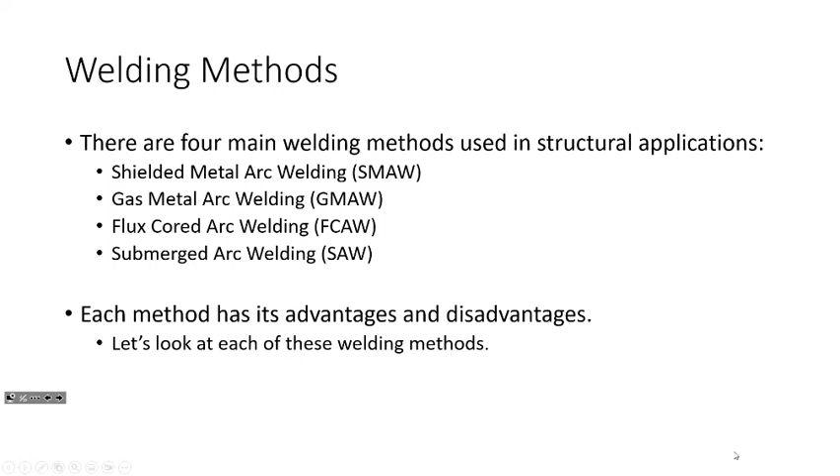But don't worry, I've got a slide for each of these. So the first one I want to talk about is shielded metal arc welding. You probably know that as stick welding, and I'd say that stick welding is probably the most common type of welding used in everyday structural applications.

First off, if you've never welded before, the first thing I want to make crystal clear is that we are not gluing piece of steel A to piece of steel B. That's not what's happening. In weld land, what we're doing is completing a circuit between our weld machine, our workpiece, and the weld electrode, which is essentially a consumable. Once that circuit is complete, electricity flows, and we are creating a molten pool of essentially three metals: the workpiece, the element I'm welding to the workpiece, and the weld metal itself. Once that metal cools, we now have a welded joint.

So welding requires a lot of energy input in order to make that happen. There is a whole field of science on the metallurgy and chemistry required to properly deposit welds and to make this happen.

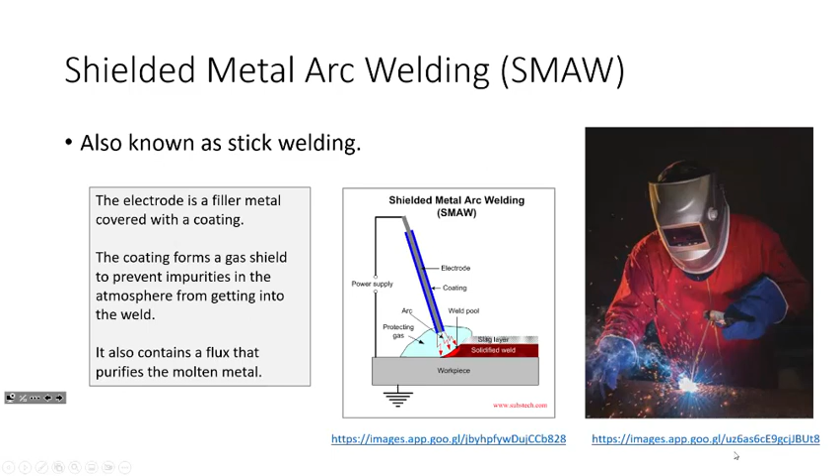Whereas in MIG welding, we do that a little differently. Instead of a flux that coats the electrode, in most MIG welding applications, not only do you have the weld on a continuous feed, but you usually have a gas shield tank connected to that. Once you hit the trigger, not only are you depositing the weld electrode, but you're also depositing that gas as well.

How many of you have ever done MIG welding before? What do you think is easier, stick or MIG? I'm just curious. I like MIG because that's what I have, and you can actually weld more continuously — than stick, it's faster. You have a continuous feed of electrode in the machine. It comes on a drum, about that big around, and it's continuously fed. The electrode to me kind of looks like copper wire — it's a little different than that, but it's kind of like copper wire.

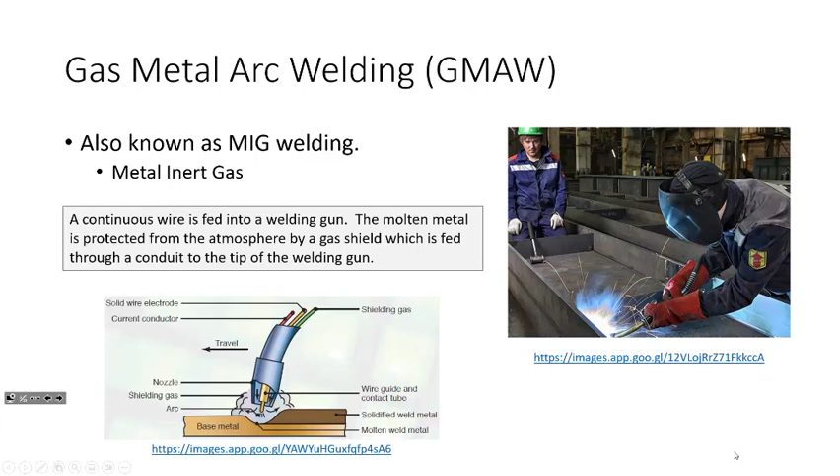It's funny, I've asked a lot of professional welders this question, and a lot of times they think stick welding is easier. To me, I never really got that, because if you're MIG welding, you just have to do this, but if you're doing stick welding, you have to maintain your horizontal movement and your depth as well. I always thought MIG welding was easier, but that's just me. These are the two predominant means of welding used in most structural applications.

There are some slight variations to that. One of them is called flux cored arc welding. Basically, flux cored arc welding is a lot like MIG welding, but instead of using a gaseous shield to protect the weld from impurities in the atmosphere, the electrode itself has a flux core that protects it as well. You can usually tell flux cored welding when you deposit it because it has this sort of white, sooty deposit after the weld. Flux cored arc welding is a lot like MIG welding, but you don't need the tank of shield gas.

Flux cored has a really cool application if you're ever welding in the field. If you're welding in the shop and using a standard MIG welder, you're not really worried about wind blowing the gas shield away, but you are if you're in the middle of a field. So if you're welding in the field, you probably want to go with a flux cored process because you don't have to worry about the wind blowing away your gas shield. That's a good benefit of it.

Yes, sir? I use the flux cored just because it's cheaper, but there's a lot of guys online that will use the flux cored with the gas on top of it. Well, they must be really worried about a hydrogen environment. I guess it works out to make a really nice weld. Now I don't know about the structural stuff, if it's really that necessary, but it's just, I guess, a preference.

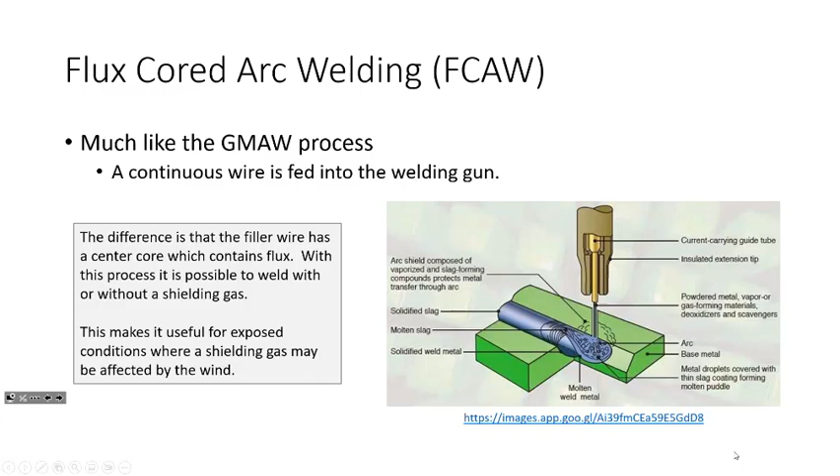Submerged arc welding is really, really good if you have a long, continuous weld that you're wanting to deposit. Stick welding, MIG welding, flux cored arc welding, etc. - those are really good to be done by human beings, and you can do those for really long welds or really short ones. But submerged arc welding is really only good for long welds.

A good example would be if you are fabricating a plate girder, and you have a flange on top of a web, and you want to weld those together. That is a single weld going along the entire length of the girder - that's a long weld. So for the purposes of ensuring proper quality assurance and quality control, it's a good idea to let a robot do that type of weld, and instead let human beings handle the more intricate, complicated welds that require that degree of control.

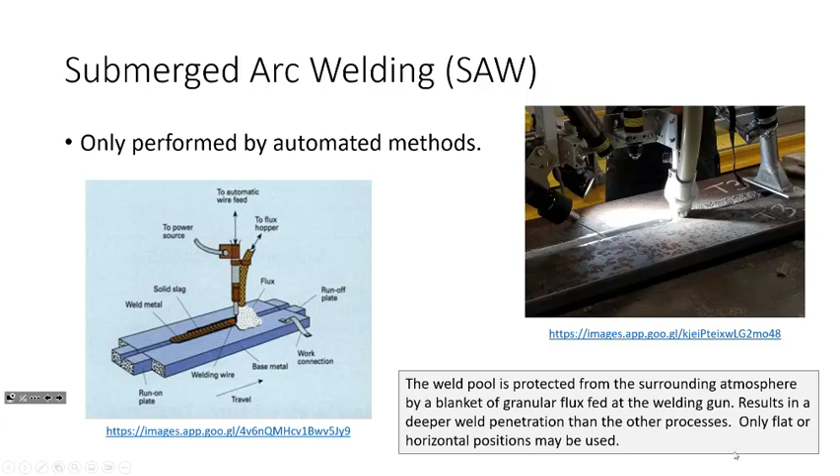The way the process works is that in order to protect the weld from impurities in the atmosphere, the weld is actually performed submerged. The first thing you will see is this deposit of granular material, and then the weld is done underneath that, and then the robot scoops that weld material up and keeps going. So the weld is actually performed underneath this granulated flux, hence why it's called a submerged process. It does allow for deeper weld penetration, but you really can only use that in flat or horizontal weld positions. We're going to talk about weld positions here in a second.

Before we get into weld positions, I want to talk about the types of welds that we deposit. And don't worry, I've got some pictures of this so you all can see it. I would say first off, the vast majority, the most common weld that you see in just about every single weld application, is a tack weld.

Everybody know what a tack weld is? You just kind of stick something together real quick, to make sure that it's lined up before you really put the weld down. Because once you really put the weld down and realize you screwed up, it's going to take a lot of grinding and a lot of work to get that piece separated. So a tack weld is a temporary weld to hold parts in place while more extensive final welds are made. Tack welds really are more of a concern from a fabrication perspective. More often than not, you're not designing tack welds. That's just a fabrication concern, but I think you need to know what they are.

Now, as structural engineers, 90% of the welds that we design and specify are fillet welds. A fillet weld is a bead of weld that is placed along adjacent members. And don't worry, I've got pictures of all of this.

Beyond fillet welds, the second most common weld that we see is a groove weld. A lot of times you won't hear them referred to as groove welds, you'll hear them referred to as things like complete joint penetration or partial joint penetration. Sometimes they're called PJP or CJP welds. Essentially, those are made to splice two plates together. They're not really very demanding from a design standpoint because you're speccing out the weld to develop the full capacity of the plate. You just need to be aware of them.

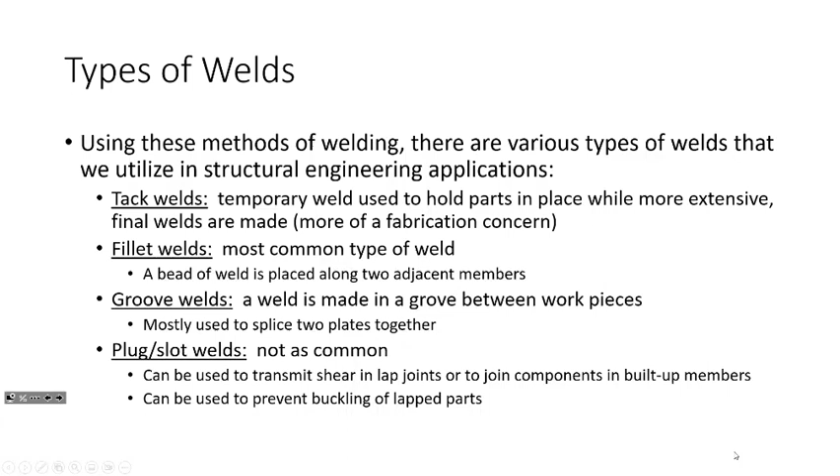Every now and then you'll see plug and slot welds, but they're not all that common.

Okay, here's some pictures. I think pictures are great. So these are tack welds. Again, tack welds are just a second or two hit of the trigger on the MIG weld, or a second or two of contact with the stick, just to get the pieces attached to one another, just to make sure that everything's square and measured up and lined up correctly before you actually deposit the weld.

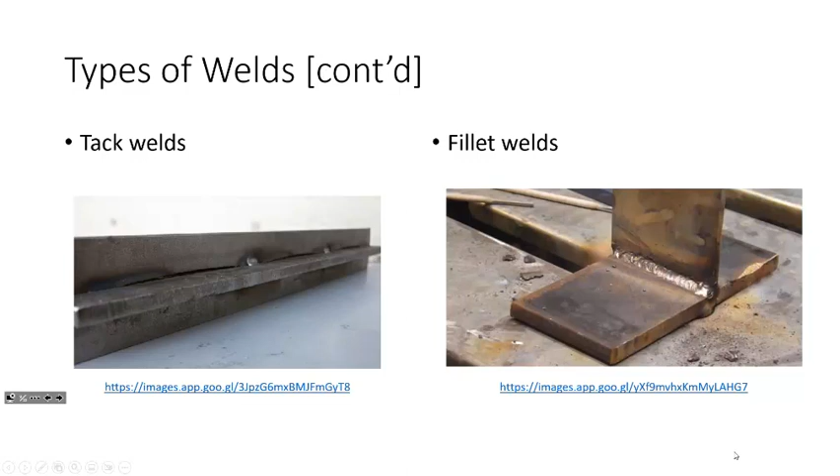The most common structural weld that we design as civil engineers is a fillet weld. Again, a fillet weld is a bead of weld that we place along two pieces in order to attach them together. So you will see connection plates attached to columns using fillet welds, and extended end plates for beams. This is the vast majority of what we do as structural engineers, done using fillet welds.

Groove welds, again, are really where you're trying to splice plates together. You're literally trying to take plate A, plate B, and splice them together. So what you're doing is essentially cutting a groove in the plates and filling them with weld metal. That's why the class of them is groove welds, but the most common ones that we see in applications are complete joint penetration or partial joint penetration.

Plug welds, not very common, but you do see them every now and then. That's where you have a hole drilled in the upper plate, you lap it on top of the lower plate and fill that hole with weld metal. Uncommon, but common enough that they're in the specification.

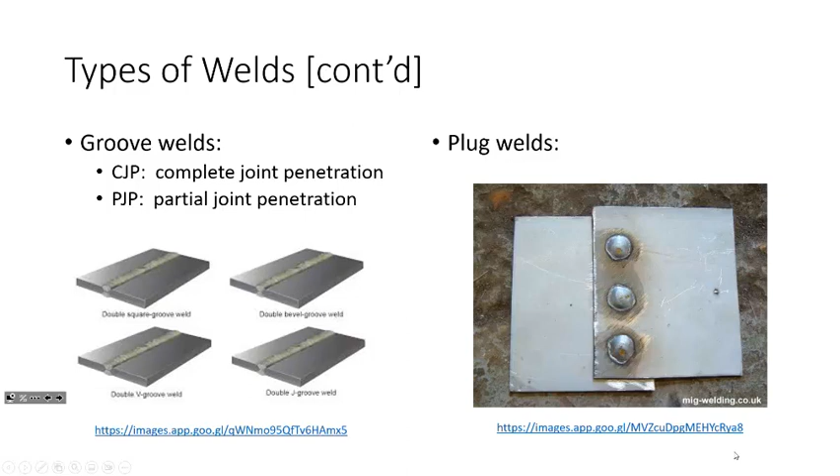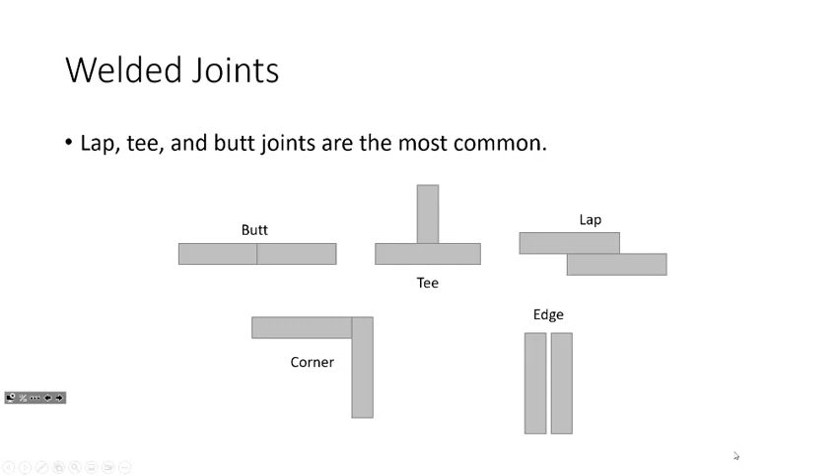Okay, here is some terminology that you will see for welded joints. What I mean by welded joints is when you're taking plate A and plate B and joining them together. How can you do that? We've already heard the term lap joint, talked about that with bolted connections, a plate lapped on top of another with a bolt through them. Now we're looking at depositing fillet weld along this area to fuse the two plates together. T-joints are also incredibly common for things like flange to web connections. And then butt joints, these are pretty common for two plates butted up together, commonly used for groove joint or groove weld applications.

Anybody ever done an overhead weld before? I'm just curious. They're hard. They're also kind of a little dangerous, because you're like, hey, here's this molten metal, please don't fall on me, you know. Anybody done any vertical welds before?

I've done some vertical welds before. They're kind of hard. When I was in the structures lab, I had to weld connection plates to the end of a beam, welding it like this. It was kind of hard to get a nice bead on that. That was about the limit of my difficulty. Flat welds and horizontal welds aren't too bad, but they start getting more difficult when you go past that.

I think the main point I want to get across to you as engineers is that it's our responsibility not just to do the math and make sure the connection has adequate capacity, but I want you to think past just solving the equations and getting an efficiency of 90% or better.

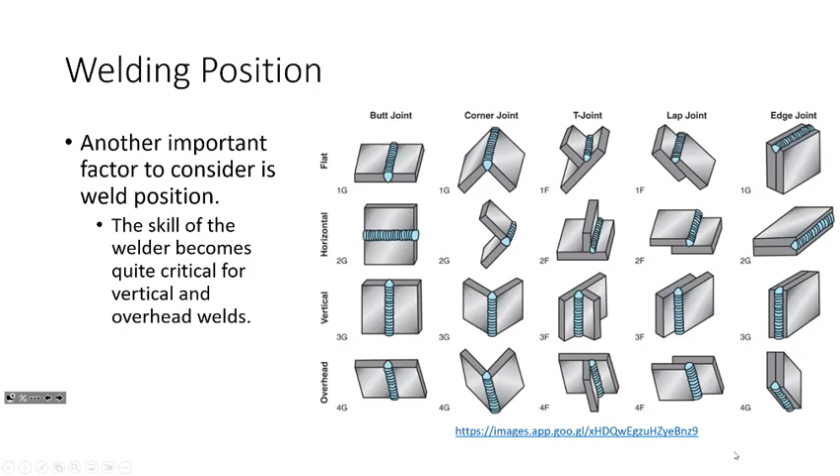I want you to ask, are you speccing out a structure that is going to be easy to fabricate? Are you proposing a connection arrangement that requires an overhead weld in the field? Is there a better way of doing it so you don't have to worry about that? That's an expensive weld to produce, it's difficult to produce, and it's difficult to produce in adherence with specifications. So try to avoid it if you can. You need to be thinking about that on larger design projects.

Have you ever seen weld drawings? They can be a bit of a mess. They can be really complicated, especially if you look at weld drawings on mechanical applications, because the symbology and legend we use to explain how welds work can get really complicated.

Whenever you're defining a weld, there's a standard series of symbols that we use, and they all have a certain meaning. I'm not going to expect you all to do all of this - it's way more complicated than what we need for this class. However, there are some I do want you to be able to spec out.

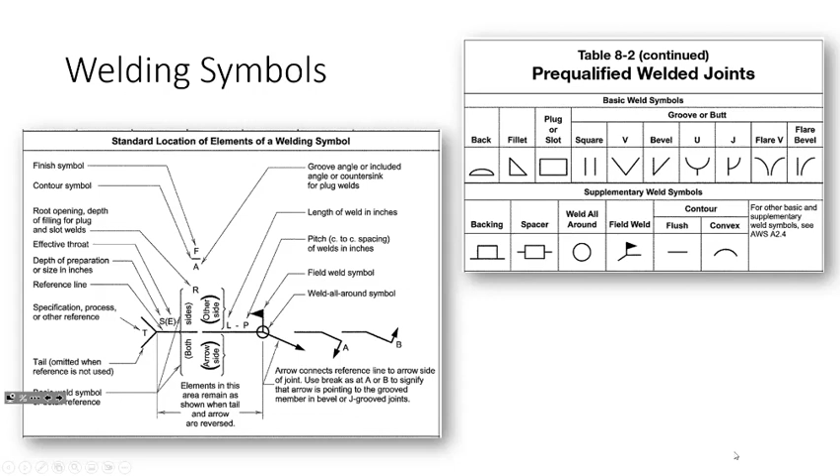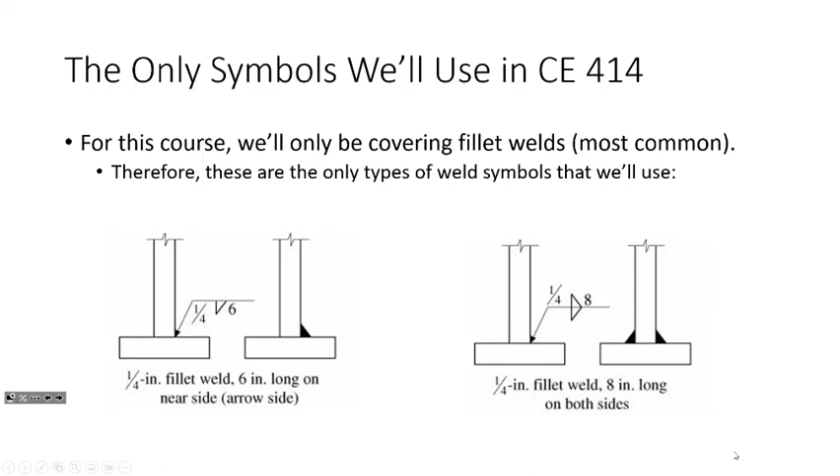Okay, now let's talk about the math. Let's talk about the capacity according to AISC specifications. And so really what we've got to wrap our heads around is this concept called the effective throat of a weld. And then we'll look into the specifications.

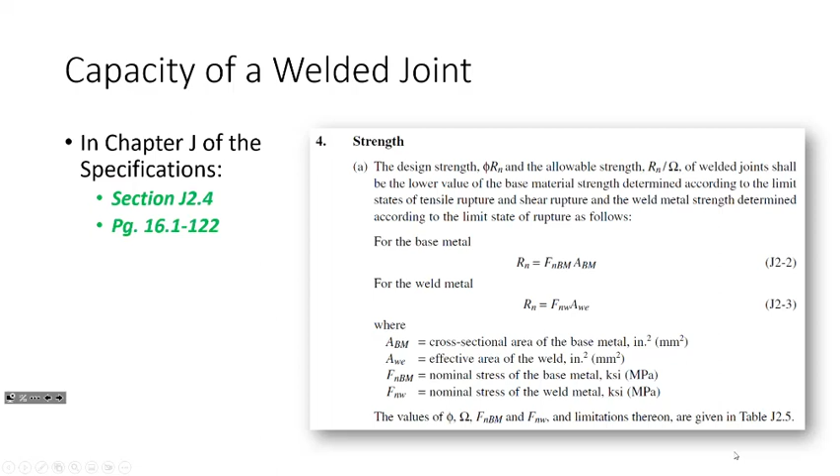The problem is that this is just the section of the code that defines the strength, but all of these terms about the area, the phi value, the stresses and all that are defined in table J2.5. Let's all turn to table J2.5. It's on page 16.1-124. This is kind of a big table, there's a lot going on. I believe actually what we're looking at starts on page 125. Table J2.5 is really kind of an important table in the spec because it lists a lot of capacities of welds all in one table, whether it's a plug weld, a slot weld, a groove weld. It's all kind of in that one location in the spec.

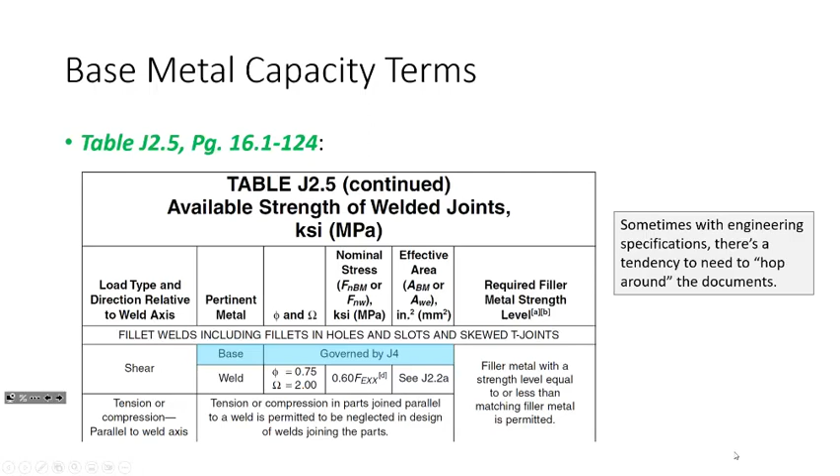I just want to take a step back and say, with structural specifications - and this is true with specifications in general - there's a tendency to hop around from section to section. You're looking here, it tells you to go there. That's just how specifications work, you've got to get used to that. It's not just a steel design issue, it's an issue with engineering specifications in general. You're trying to solve a problem, so you look for a specification to tell you how to solve it, but that's not how they're written - they're written to help engineers solve any problem. So to solve your problem, you might have to hop around a little bit. That's just the name of the game.

Now, for the capacity of the base metal, there are essentially two limit states we have to ask: whether the material is going to yield under shear, or whether it's going to fracture under shear. Fortunately we're seeing terms we've seen before, like gross area in shear and net area in shear - we saw a lot of this when we did block shear. What's cool about welds, particularly fillet welds, is those areas are a lot easier to compute.

We are not dealing with bolt holes. The net area is the gross area minus the area lost due to the presence of bolts - but we're not talking about bolts, we're talking about welds. So in general, for fillet welds, the gross area and the net area are the same. We're not removing any material from the connection to generate a fillet weld.

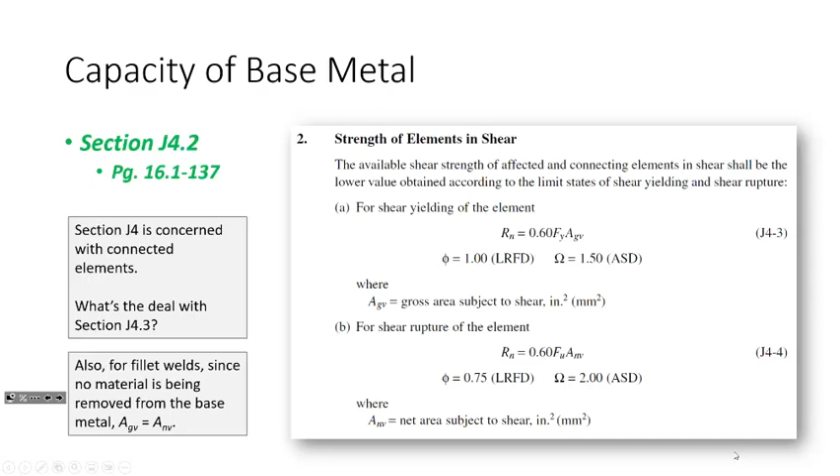That make sense? Now, the one thing you have to pay attention to is that for shear yielding, the phi value is 1. For shear rupture, the phi value is 0.75. So this is kind of what we get - our welded connection summary capacity. Here's our weld metal capacity, here's our base metal capacity.

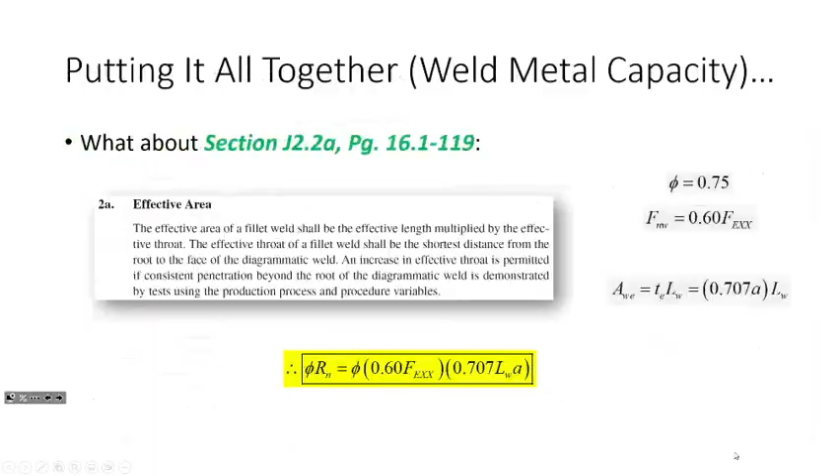It comes from this: if you specify a weld size, how do you get this distance? This is a 45-45-90 triangle. If you know this distance, then that's just a sine or cosine of 45 degrees. What is the sine of 45 degrees? 0.707. That's all that is, it's just trig.

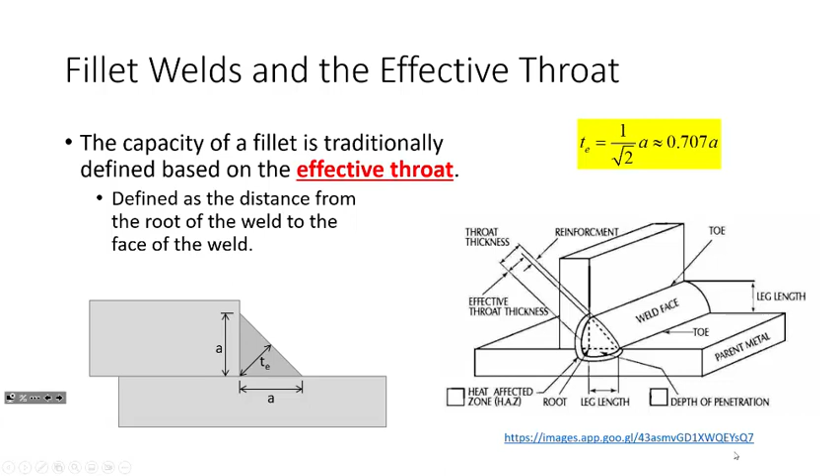Does that make sense? Yeah, because on page 119 it said effective area - and that's what I wondered, how you derived the equation. That part isn't coming from the spec, it's just coming from the trig.

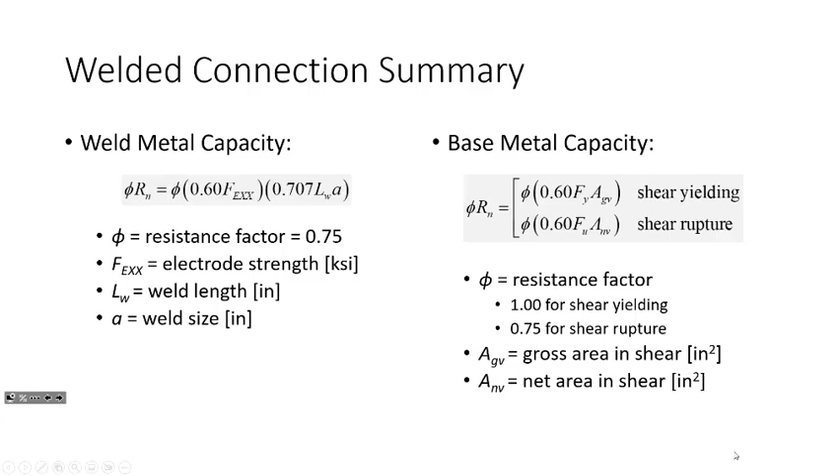So that makes sense. Now, the only other thing we haven't discussed, which will become important when we do our example on Wednesday, but I want to mention now, is some limitations on welds.

I'll talk about the weld orientation later. Okay.

Like with bolts, remember there was an analogy about whether bolts could be spaced too close together or too far apart, and there were reasons for spacing limits. For bolts, if they get too close together, we can't get a wrench around them, and if they get too far apart, water seeps in between.

Just as there were limits for bolts, there are limits for welds, but for different reasons. For fillet welds, there are limits on the minimum size and limits on the maximum size. Table J2.4 will tell you the minimum size of a fillet weld, but that minimum exists for a different reason.

I want everybody to imagine a cartoonish scenario. Imagine I was welding two plates together, and those plates were 4 inches thick - huge, right? And imagine I deposit a weld that's only a quarter inch big. That's a super tiny weld.

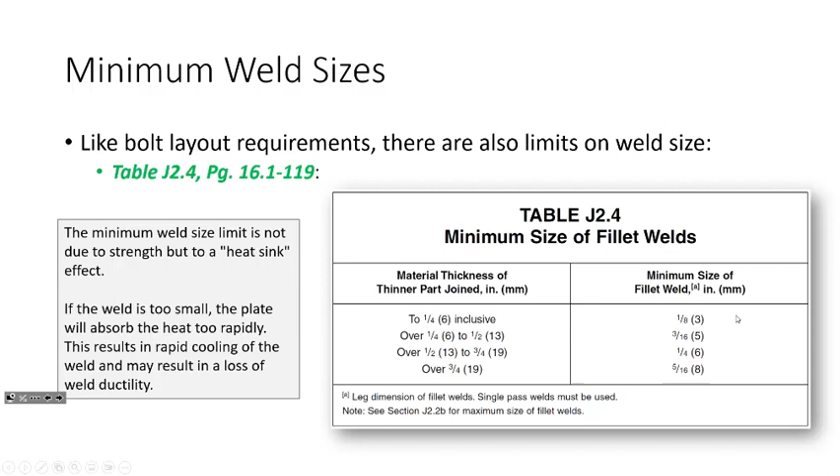The reason for a maximum fillet weld size is so you don't melt the plate. Imagine you're trying to weld two half inch thick plates together - you have to back off the weld a little, because if your weld gets big enough to be the thickness of the plate, you'll start melting the plate and won't have proper weld geometry where the plate and weld meet.

Does that make sense? So for most structural connections, to determine the maximum weld size, we take the thickness of the plate and back it off a sixteenth of an inch - that's about the maximum size your fillet weld could be for most connections. If you've got a really thin plate, like a quarter inch or thinner,

we say, what the heck, just fill the whole thing up. But for most structural connections, we have to back that off a little so we maintain the geometry of the plate. So for minimum weld sizes, we're trying to avoid the heat sink effect. For maximum weld sizes, we're trying to avoid distorting the plate by melting that corner. Does that make sense?

All right, any questions so far?

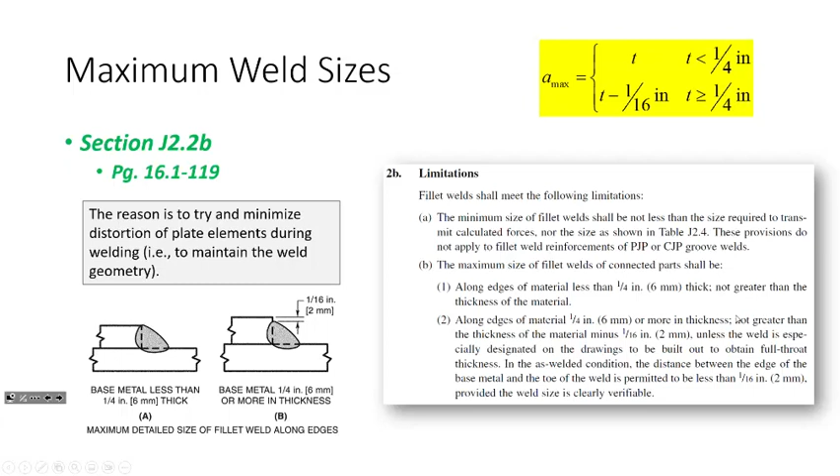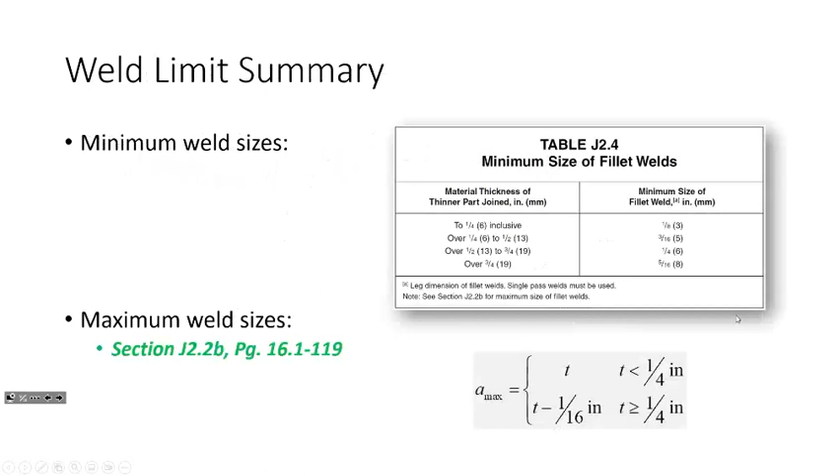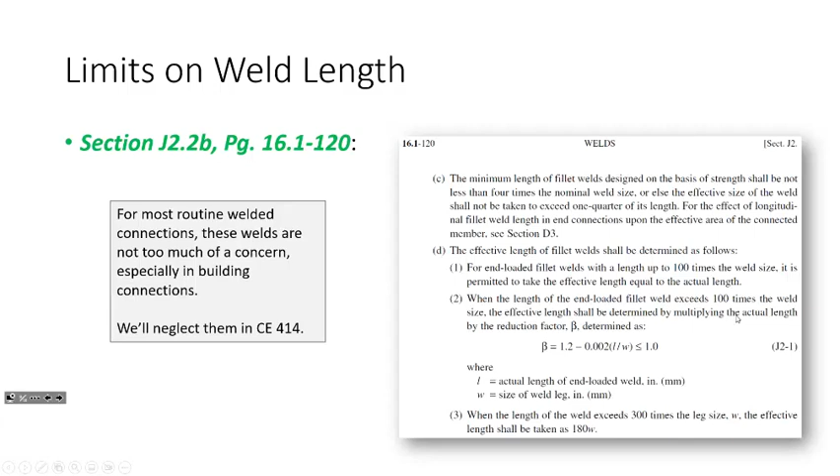I think I've reached my desired limit - I don't want to information overload you today on welds. So we're going to get into an example on Wednesday where we look at the capacity of a fillet welded connection, but I'll leave that for Wednesday. Today I want you to absorb this info. We'll come back Wednesday, review our weld capacities, talk more about ductility, and then get into some of the math. I think when we actually start digging into the mathematics, this is pretty easy, but I want to jump ahead a little to make room for balanced welds a little later.